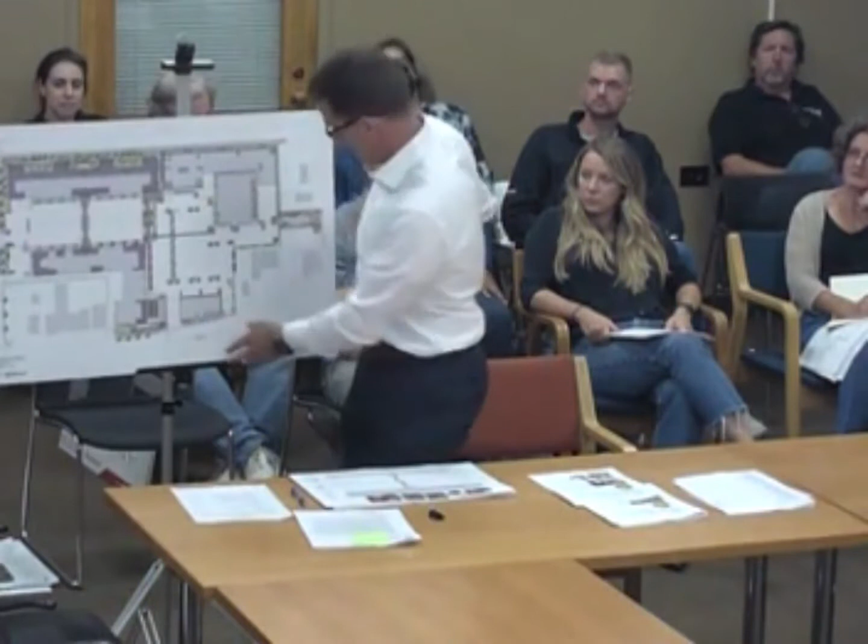The first was you encouraged us to look at, and let me get the site plan, alternative seating options for the pocket park. And the pocket park is out on the Noroton. So we've got quite a big site here, this being Heights, the train station being here off the plan.

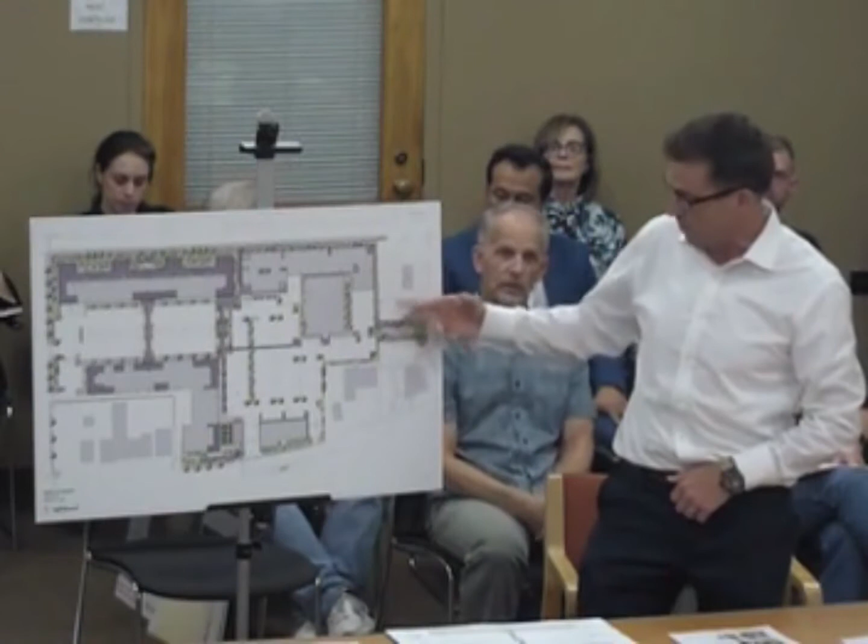This is our landscape plan. This being the Noroton, and what we continually call sort of our pocket park, which was an old prison paint building that we've since razed, and now we've got a pocket park here that steps down into the site, and it's immediately adjacent or opposite the entry to Equinox.

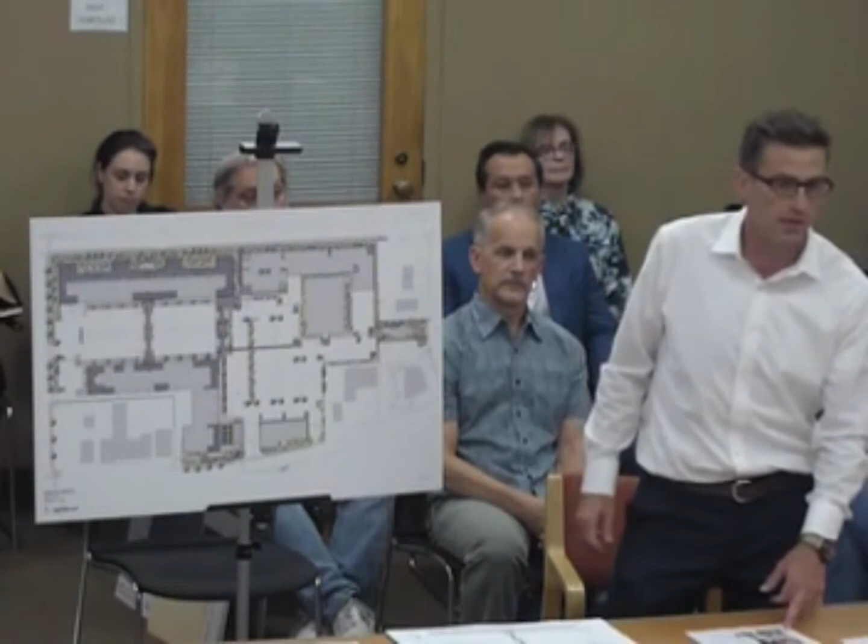The seating option that we presented to you back in March was the very first seating option, option number 1 in the email, and at that time you encouraged us to look at several other options. So we've proposed either option 2 or option 3. My preference would be option 3, but those are the other 2 seating options that we would appreciate your consideration of tonight. Let's stop there and see if there's any comments, and we'll go on.

If you guys remember, I think a few members of the board did not like the mustard, but for the most part, the board enjoyed the eclectic mix, like introduction into our New England town. Not to put words in your opinions on what was said, but just refreshing your guys' memory to that March meeting.

Go for it. I'm leaning toward option 3. I don't have a real strong opinion, but I think it is kind of a nice take on an Adirondack chair, a nod to what's considered ubiquitous to this area, but then also takes it up a little bit more modern.

Color-wise, white's fine with me, but maybe mixed greens and whites. I don't know, how many chairs total are we talking?

It's not a lot, and in fact, I don't know if this is in your package, I would imagine not. I'll pass this out now, you can turn to page 4, which would be the pocket park. I'll pass that out now so that you have it, it's the exterior FF&E plan, and this may have been, I wasn't here at that March hearing, this may have been distributed at that time. But this is probably about 5 or 6 copies.

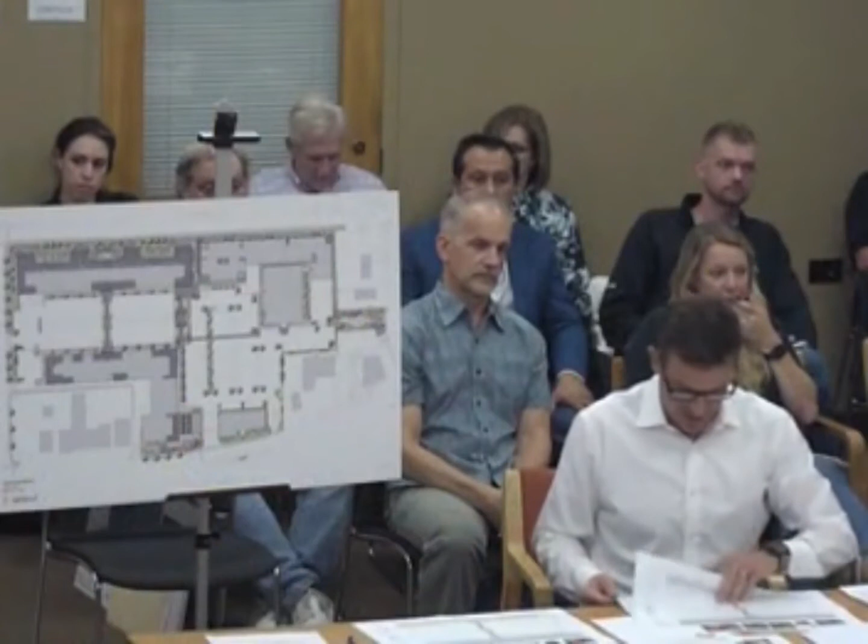If you turn to page 4, you'll see the chair happens twice in the pocket park. And in fact, as I was reviewing this tonight, I thought we probably should order 4, not 2.

You know what, Patrick? Keep going with your presentation, because I think the more you talk, it might tie in your objective a little better. Okay, fantastic. But I like that Dave Riley gave some initial thoughts.

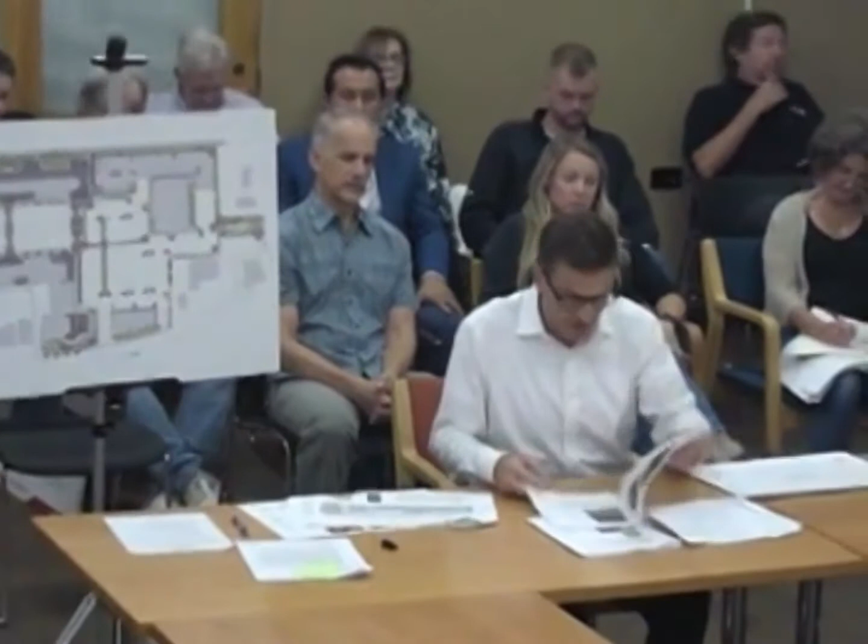There was a question on the material for the walls in the pocket park. If you turn to page 3 of the email, and if you've driven by the site along West Avenue in the past 4 or 5 months, we have what we originally spec'd as Connecticut Fieldstone. That's a picture of the walls along West Avenue. That is indeed the composition of the exterior walls in the pocket park and largely surrounding the site along Edgerton and Heights as well. The Heights stone has only gone up recently, so you may not have seen it yet — you may have been looking at concrete walls over the past several months there. But that's indeed the Connecticut Fieldstone. It is indeed stone, not faux stone, and not an aggregate material.

Okay, that will be the background for the chairs. If you look again at this plan, you'll see it's not even a semicircle — it's more like a quarter circle, or quarter ellipse. I'm getting my geometry right. The chairs are in that pocket park, with plantings and fieldstone.

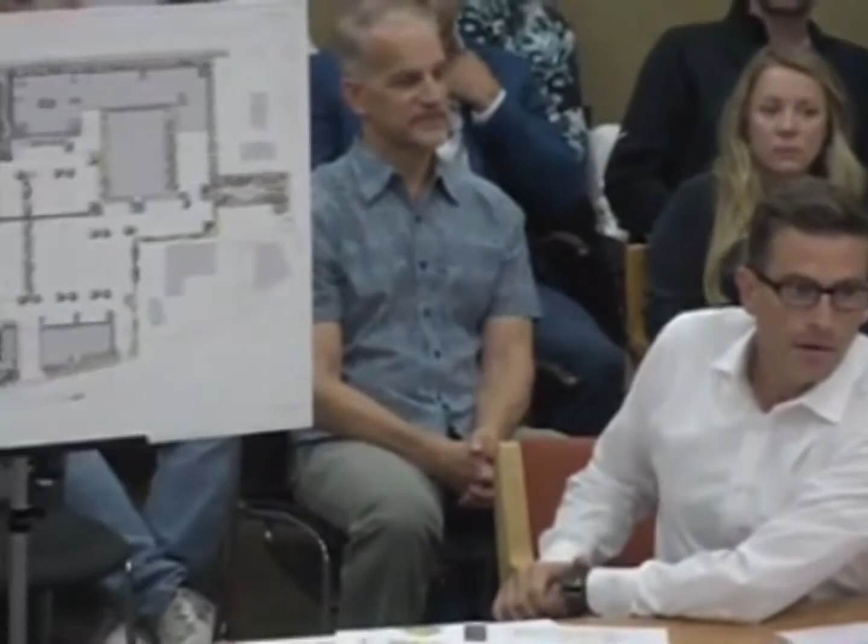Yes, so you've got loam and seed — a lawn that the chairs will be on, and we'll probably end up ordering 4 as opposed to the 2 that are shown. In that ellipse behind it will be the Connecticut Fieldstone. It will not be fake grass — it'll be real grass with irrigation to make sure it grows.

How are you preventing the chairs from being stolen? That's a great question — they weigh 200 pounds. That was part of the design direction here, which I'm not actually a big fan of, so I'm glad you encouraged us to look at others. They're all relatively heavy pieces of furniture. That's the best we can ever do. We do anticipate things walking off the site from time to time, and we will backfill.

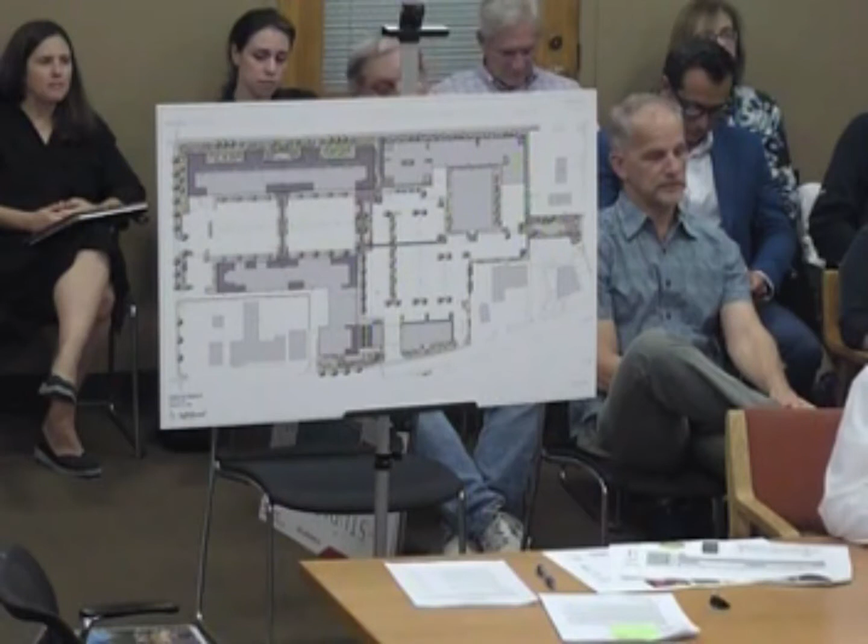Unless it's a bench that's bolted down and affixed to a concrete pad or slab of some sort. So you should probably order 8 chairs and have 4 go into storage.

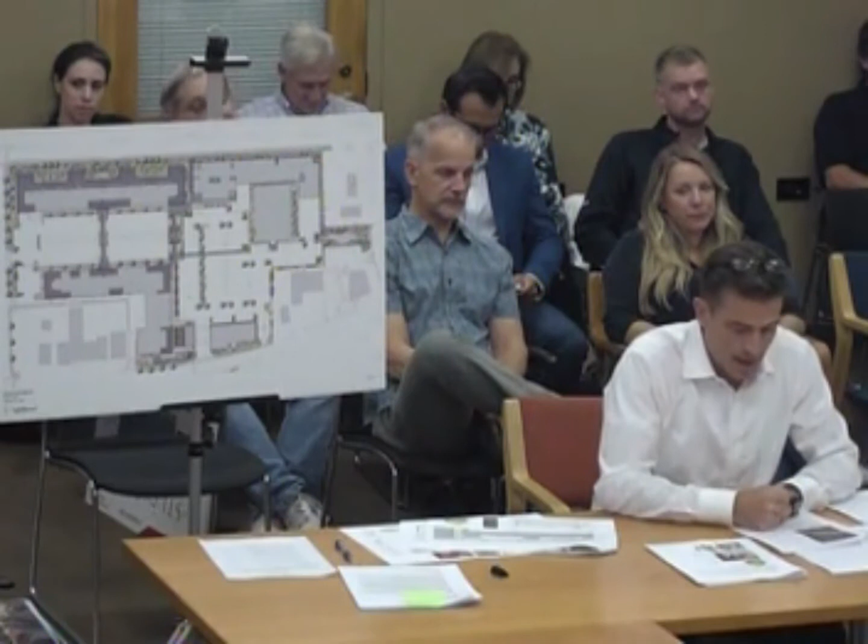But we won't have cameras up in that park at all. It'll be well lit, not garishly lit, but lit, and we're hopeful that the size and weight of these chairs deter any would-be thieves.

Seasonal plantings — this is a planting list which we included, and you may have some familiarity with some of these. You don't have to go through this, Patrick. This is great, I saw it. We had pictures attached.

With Leslie, comments or questions? Yeah, I think I speak for myself, others may have other ideas — I'd like to veer away from yellow, red, or orange plantings, leaving white, purple, green. I think with the colors we have on the facades, if we start doing bright samples and whatnot, it's not going to work with their facade color.

I think the facade color — I'm trying to remember — it changes, but the reds and yellows could pull out against it. Those are loud colors. You're looking for something a little more subdued or refined — pinks, just not reds, yellows, or oranges. Got it.

What about fall colors though? Because in the fall and winter it's a lot of through-season color. No yellow, red, or orange, even in that season? What about Heuchera — how do you pronounce it? Heuchera? I think it's the cherry cola or watermelon variety.

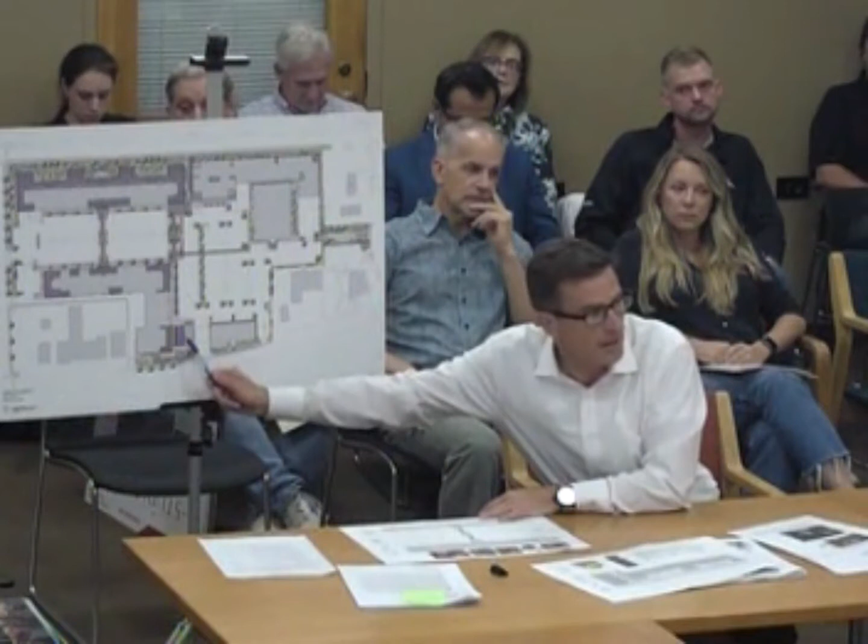But they're not planned for the pocket park. They're planned for this particular area here where we've got Gregory's Coffee and Seymour's, where we expect quite a bit of activity and eyes to prevent the walking off from happening. That's where we've got most of these located. But are they not here, going to be put away at night? Because they just seem very tippy, even in a windstorm.

We don't typically put them away. We've got them on other properties. Although these we over-order from the beginning. Okay, because we expect, well, never want to think too cynically, but it's just attrition. Yeah, it is. Okay, next question on the pocket park.

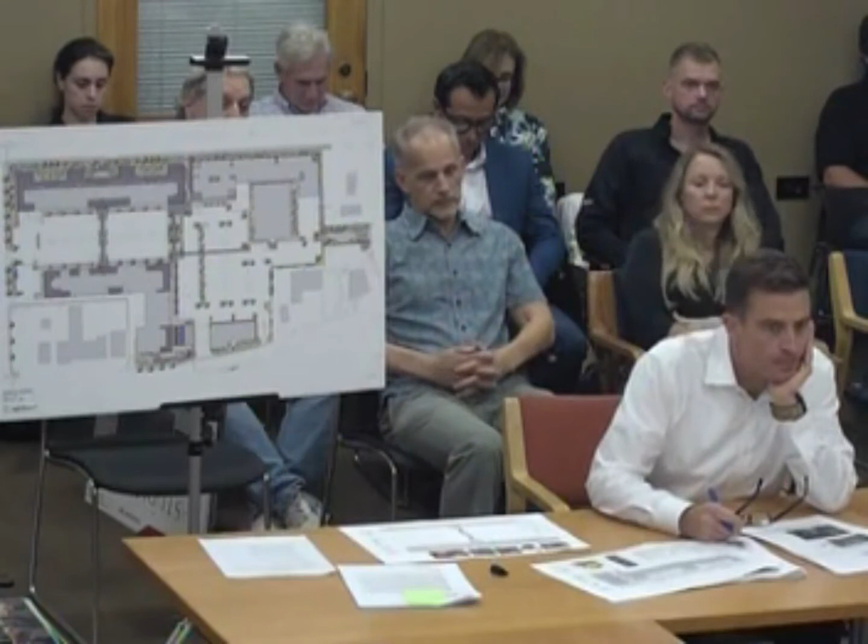I wasn't here for that meeting. Just really quickly, these retaining walls - are those at a height that can be, just from a placemaking standpoint, are they high, or is that a place where people can sit as well? Or are you really using it as a walkway? Like sit on the walls? Yeah, I think that was one of the questions.

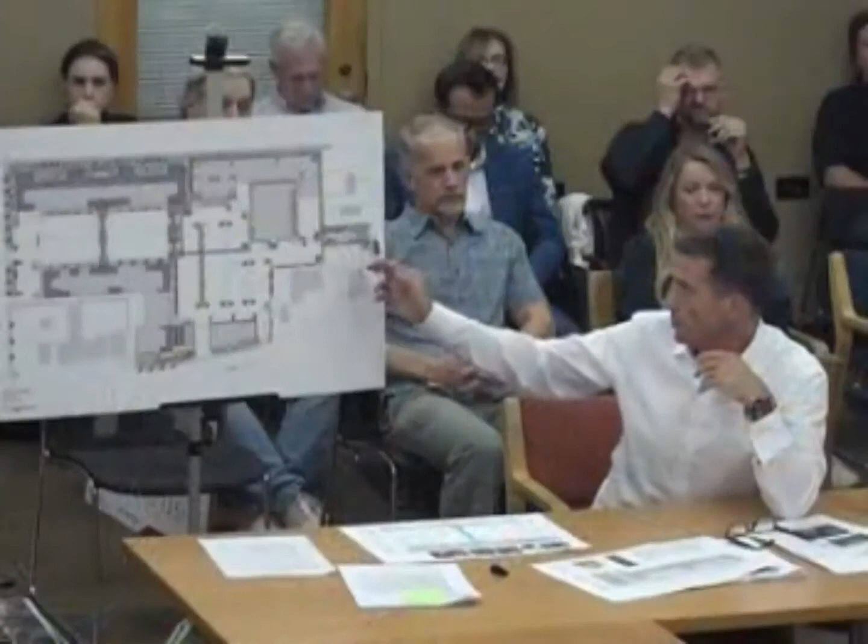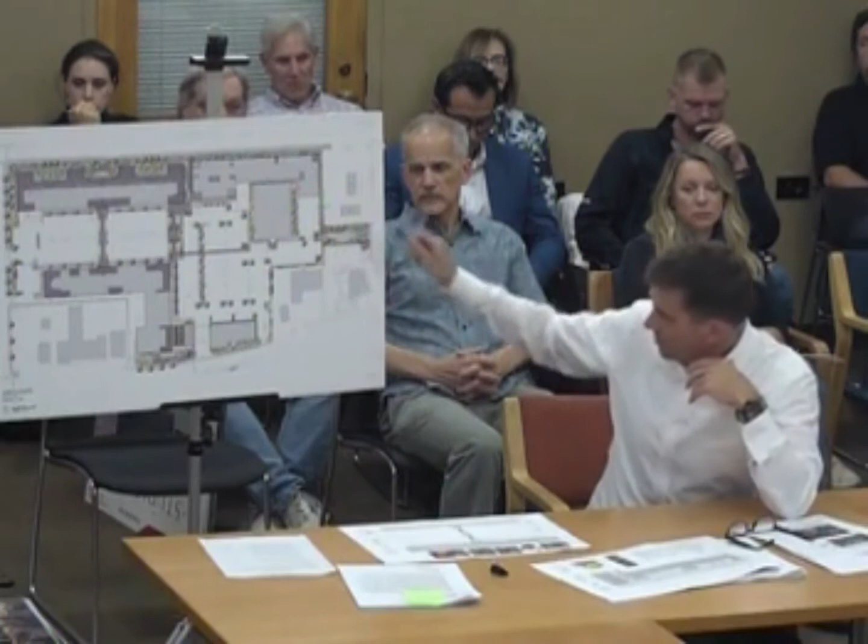Sorry, so they die as the grade moves. The top of the grade moves as the stairs would suggest, sort of in this direction. High point being here, low point being there. So they die into the grade when you get here.

They're indeed not meant for walking on top of. However, certainly for a good portion of them, they could be seat walls because many of them start off as really almost a knee wall. So it's not, and they never get to a height where we'd be required by code to actually have fall protection either - it's never too high, if that makes sense.

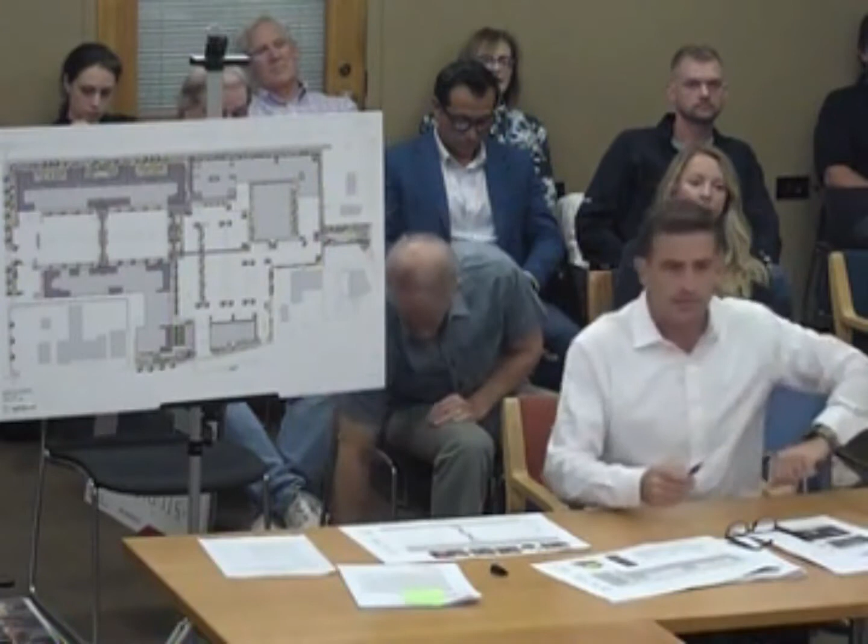All right, great. Patrick, 2 last questions. On those walls, what is it - we asked last time what the cap would be on those. Did you guys decide it's gonna be a bluestone cap? We've got, wherever we've got fieldstone, we do have a bluestone cap, with the exception of one wall along west.

Correct, yes, that's exactly where. We actually had referred to one of these renderings already. That's a great one to look at.

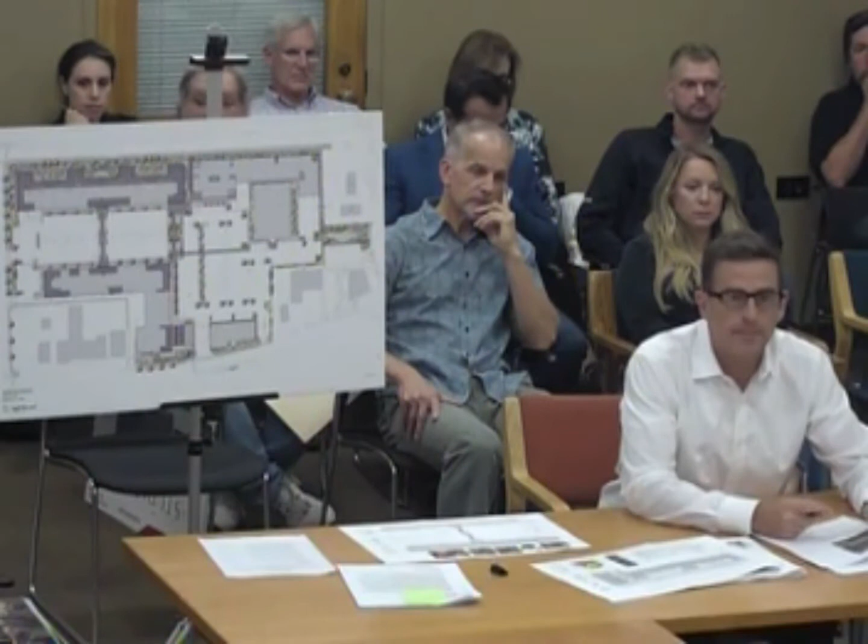Are the planters going to be one of these colors, or has that been decided? There's lots of different color planters. This is generally the design and color palette, as well as design, of the planters that we intend to locate throughout the site.

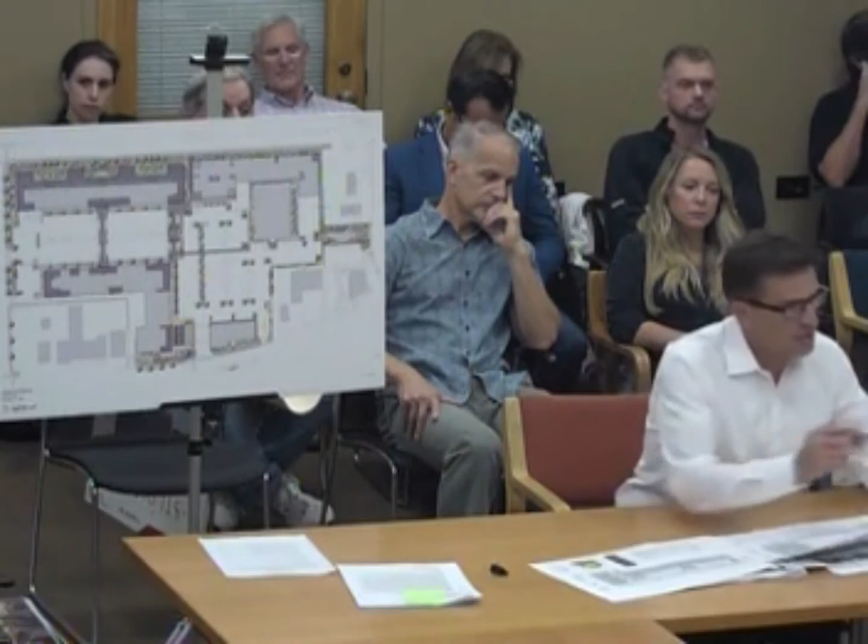So the variety, all of them. That's obviously red, so I took your comment to be we were speaking in relation to the pocket park, but I was thinking you generally are applying that comment across, right?

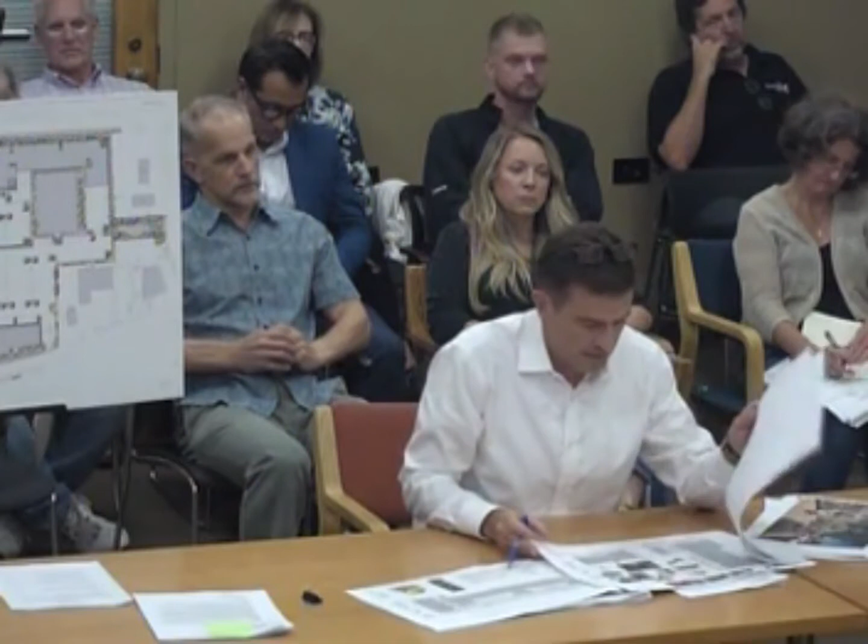Okay, and white actually is something we like too. Or black would hide cigarette burns. I'm guessing it's a composite? It is, yep, indeed.

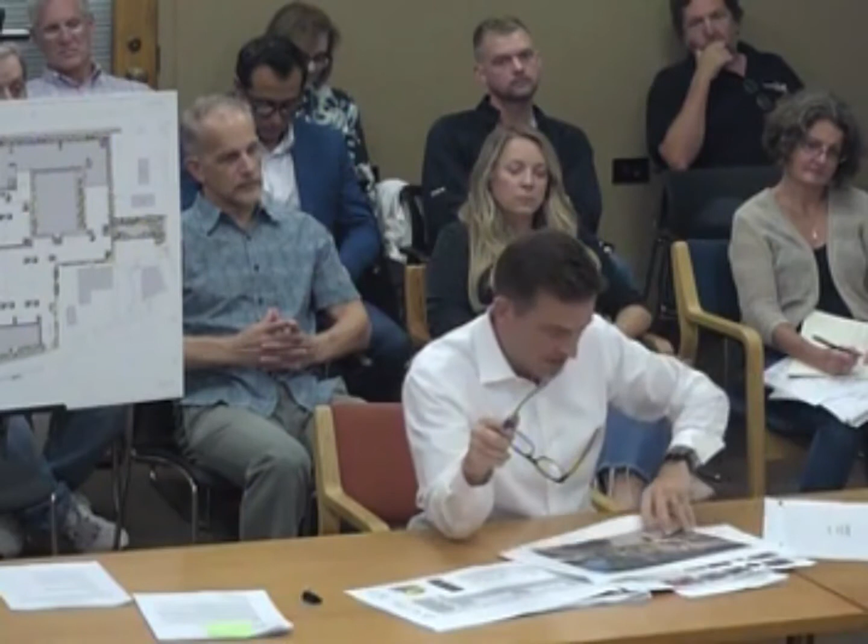And Patrick, across the whole site, the pocket park and these different parks depicted here along the walkways, what are the pavers made out of? It depends. I know we brought the paving samples, you've seen all the paving samples. I've never seen them mixed in with everything else, so I'm not sure what was what.

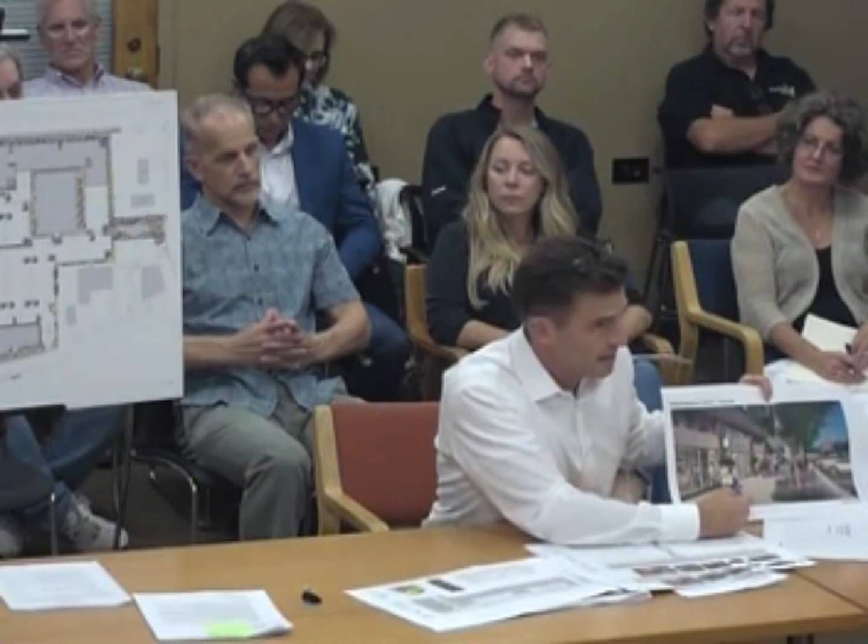Am I catching you off guard with it? If I am, we can email about it. I think I'd like to email just to be sure. In some of the renderings we'll show you tonight, particularly relative to Seymour's, and if you've been at all the Walgreens, you'll see the concrete that's got a sort of brownish hue to it. It's not pronounced and not loud, but it's got a brownish hue.

That is indeed what we've got in most of that pocket park. But let me reserve the right to be wrong on that. I'm fairly certain I'm correct. I'm gonna make a note, you're gonna email us the final paving selections for the different areas. Will do. Perfect.

Okay, anything else, guys?

Patrick, it's always wonderful to see you. You do such a thoughtful job. Thank you very much, we really appreciate it. I appreciate your time and consideration here, and I really appreciate you taking the time with these final details. Like the devil in the detail, I kind of hate that saying, but it's kind of true. It's really pulling together. The site's pretty massive, it's kind of hard to absorb, and as you guys are fine tuning the details, I think it's really helping bring it all together and it's starting to. I appreciate that greatly.

That's been the challenge, it's a big site, we got a lot going on. And to sort of bring it down in terms of scale and make it an inviting pedestrian environment, these sort of details matter. Yeah, all right, this is great.

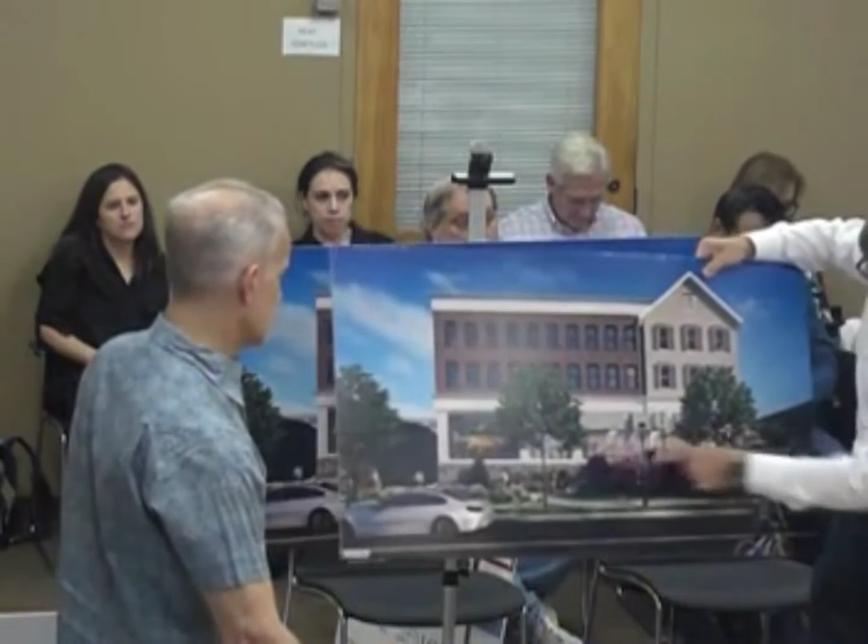The lavender you're seeing down there, that's not going anywhere, that's actually staying. It's in shade though because of the purple bushes coming up. But the idea of ivy is not a bad idea at all, because we've got some height there.

And then the color of the lawn furniture, the reds, the light blues, is it possible to stick with more woods?

They're kind of starting to look like Stamford Mall with the reds and the blues and the yellows. So, can we do more organic, with the black umbrellas, black and white awning? I think that would be better, more chic. So these were the furniture colors here, the Adirondack chairs, and then these were the bistro chairs.

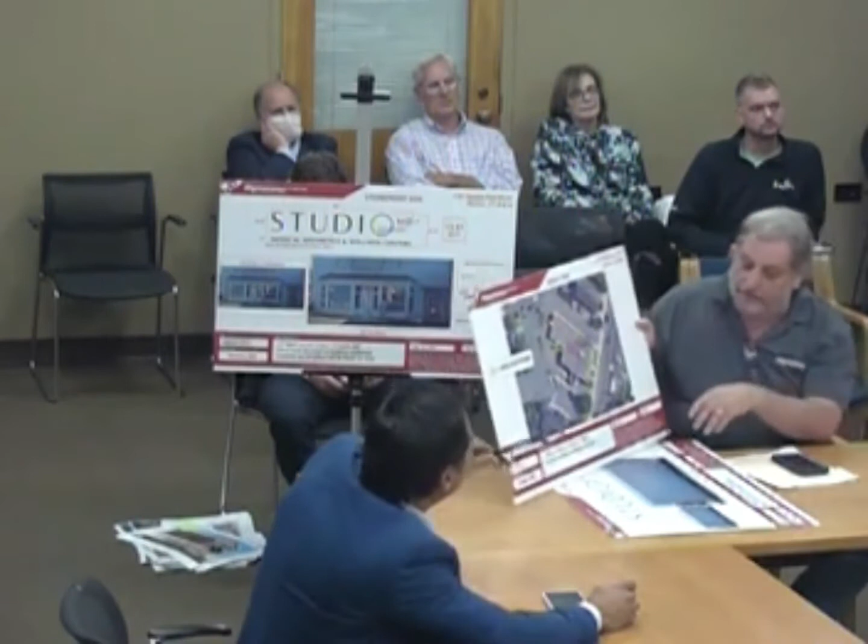So my question, difficult I guess, is - when I think of a sign, I'm looking for actually usually an entrance. And there's really - I get the fact that it's around the corner, that's the entrance. So I don't know whether it would be better to either put that Studio MD sign on the right, flush right towards the side of the door.

This one moved down? You were saying this one moved down? Yes, that makes sense to me too. Or either that, or put a blade sign so that it's double facing, so that you know where it is, like you're able to see it.

So do you know what a blade sign is? If we put a blade sign over here, that still may not be visible for most people that park over here, it's gonna be looking at the thin side of it. Okay, so how big of a blade sign is required in Darien, like the maximum size? I think it's a square footage, but it'd probably be roughly 2 feet by a foot and a half, or three square feet.

But you don't get a second sign here, so we would probably determine what that size is here, if you're gonna allow it. So the question becomes, I guess the first question for the board is, do you guys wanna allow a second sign on this empty wall in the first place?

Historically, was there a wish list - did they have 2 signs approved? I'm not opposed to it because I think we're trying to create a more pedestrian-friendly parking lot back there. So I think some sort of signage could make that wall work, but it has to go to the right.

Opposing, but yeah, it is. I would shift it over to the right. Yeah, so just move this towards the right, towards the entrance, be closer to the entrance. Right, exactly. It's gonna draw you to walk to the right.